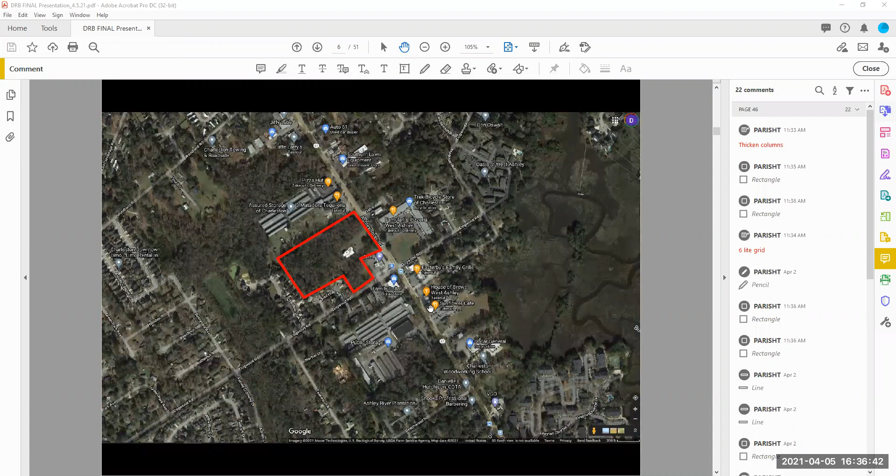You can see the red circle is the location of the site, at the intersection of Dogwood Road and Ashley River Road, the northwest corner. Here's a closer view: residential to the west, a small mini mall across the street on Ashley River Road, more residential to the south, commercial to the north, and the existing gas station on the corner of the intersection that will remain.

This is looking south on Ashley River Road into the entrance of an existing church. This church is less than 50 years old, so it did not require DRB approval to be demolished. I think they're moving forward with the demolition of this, what used to be a church.

This is also looking south on Ashley River Road. This is the existing business that will border the site to the north, and this is the same church that will be demolished. This is looking north on Ashley River Road.

Now this is on Dogwood Road, looking to the west. The existing gas station is to your right, and this area is the beginning of the site. This is close to where the entrance into the proposed site is going to be—right about here where I'm showing my cursor.

This is also on Dogwood Road, looking to the east. These are some of the residential properties that will be just to the west of the site. And with that, I will turn it over to the applicant.

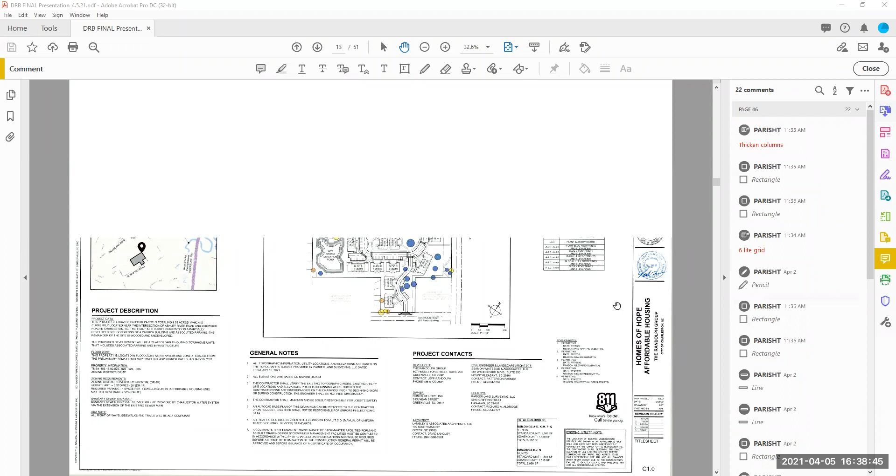So, Rivers Cape, Seamon Whiteside. This is our Homes of Hope project over in West Ashley, at the corner of Ashley River Road and Dogwood Road. Currently we're proposing 78 affordable housing townhome units in 16 different buildings. Our driveway is coming in off of Dogwood Road with a singular internal loop road and a stormwater detention pond planned to the west of the project.

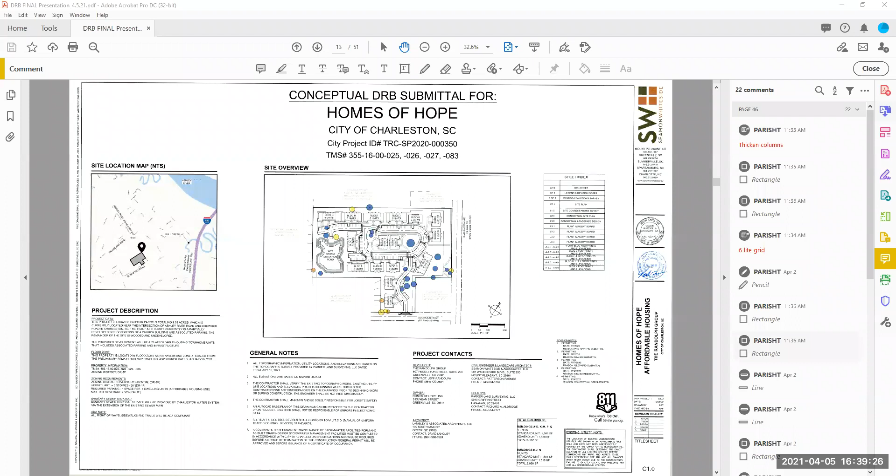Mike, do you want to? Sure, my name is Mike Cottrell, I'm a landscape architect at Seamon Whiteside. If you would move forward through the slides to the landscape portion, we'll move through a lot of the civil right there. There are two main goals landscape-wise: one was to provide a large amount of open space, and the second was to make sure each unit is directly and safely connected to each type of open space on the site.

As you can see on the plan—is this the first slide for landscape or the second? Here we go, this one? Yes, okay. We start off the open space with a central green, number 1 up there, a space created around an existing tree to be saved, a really large red oak, which will be a nice passive open space in the center of the project.

As well as a waterfront park that'll go around the retention pond on the planned west side of the site, which includes an amenity building and a dock. To the east of the site, and throughout the site, we have passive open space creating a network with paths, mostly plantation mix type paths, some concrete especially on the east side next to Ashley River Road, all connected with sidewalks internally linking the buildings to those open spaces. Next slide, please.

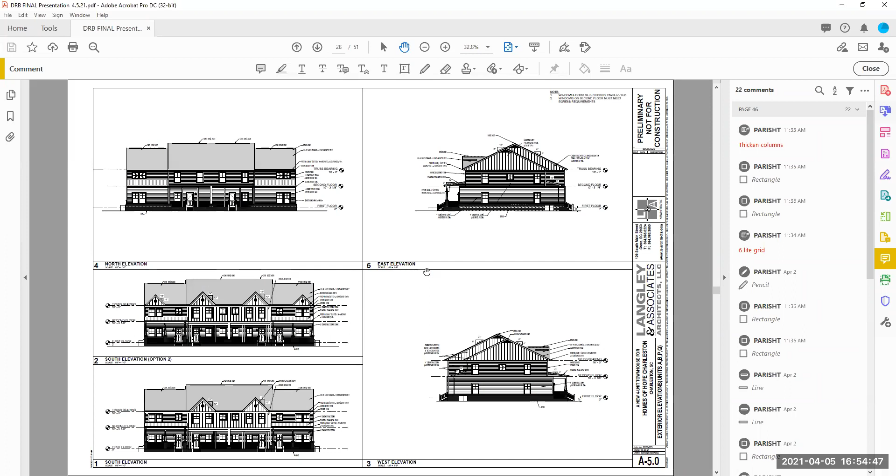Thank you. Let me ask you a few other questions then. I'm kind of scanning through, and when it's trying to align architecturally the first floor and the second floor it's somewhat challenging, comparing it to the elevations that you've provided us. Am I to understand, looking at the back elevation or the floor plan to the rear on the first floor, you, and this is the fourplex, I'm on drawing number A 2.0.

This back porch on the end unit to the left appears to have columns and stairs leading down. Am I reading that correctly? Yes, there's a back porch on the interior middle units, as well as a front porch. Okay, maybe I'm looking at the front then—on the bottom of that first floor plan would be the front, and the top would be the rear of the property. Yes, correct.

Can you walk me through the alignment of the first floor to the second floor? How do they align? The porch is recessed, so the second floor aligns with the outboard edge of the front porch on the interior units. The interior units I understand—it's that end unit. Oh yeah, on the end unit the porch is projecting beyond the front wall. The front wall of the lower unit aligns with the porch of the interior unit, and the porch on the end unit projects beyond that.

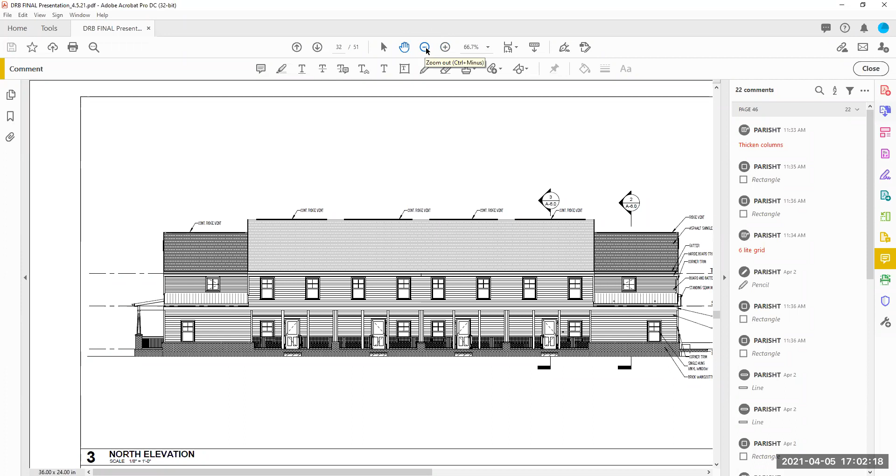The gables that you're showing on the south elevation—yeah, that's just an alternate facade that we had, one where it didn't have a gable on the end and one where we added the gables back on the end. Okay, just as an option.

That's all I have right now. Thank you.

Dino, one thing we were struggling with is the firewalls between each unit, and that's kind of why that offset is that you're seeing on the rear. It's wrapping that firewall that we're required to have, and it misaligns the downstairs and upstairs because we're wrapping the wall on the upper floor, and then we're wrapping it again on the lower floor back into that porch. So I think that's what you're seeing visually—this is maybe what you're asking us to resolve.

Okay, thank you. Any other questions?

With none, we do have one letter to be read that was received. We do not have any members of the public that were registered to speak, so I'll go ahead with the letter. It's from Katie Zimmerman.

Dear members of the Design Review Board, thank you for the opportunity to comment on the conceptual proposal for a new affordable housing project consisting of 78 two-story townhome units. As part of the site plan, I respectfully request that sidewalks be included along the property's frontage on Dogwood Road. I see a path in the design along Ashley River Road, but it is unclear whether there is a safe space for people on foot incorporated in this project along Dogwood.

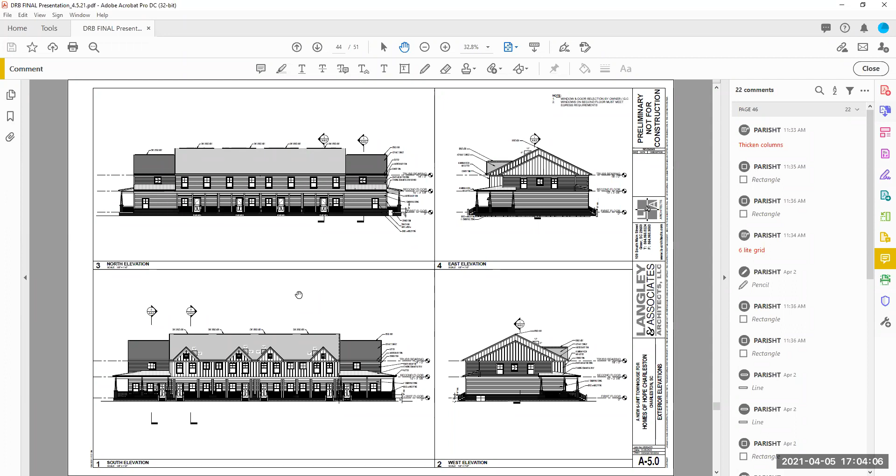Thanks again. So with that, the public comment portion of the meeting is closed, and we are now in staff comments. David, please.

Thank you, Erica. First, some staff observations before I get into the staff comments. Staff has given some feedback on the site plan during TRC meetings, but not on the architecture. The buildings appear to be somewhat prototypical, but as this is affordable housing and attractive architectural style, staff feels we can make an exception with some conditions. Height, scale, and mass seem appropriate, not too overwhelming.

The materials evoke low country or coastal architecture, which staff approves, including the metal porch roofs on the end units and the brick base. Our staff appreciates the different siding exposures between the first and second floors for a variety on the buildings. The conceptual landscape plan and plant palette are off to a good start. The applicants are providing some pervious pavers, which is also good. And there's nice pedestrian circulation with sidewalks and trails.

Staff comment one: staff recommends some articulation to the massing on the fronts of the 4-unit buildings as depicted at the second story. The board and batten and the lap siding sections are in the same plane. This is not the case on the 6-unit building. Number 2, the 4-unit buildings include windows on the sides of the first floor at the end units. Staff recommends these be included on the 6-unit building. As depicted, the 6-unit buildings have no windows on the first floor side, which leaves a long, flush, solid wall.

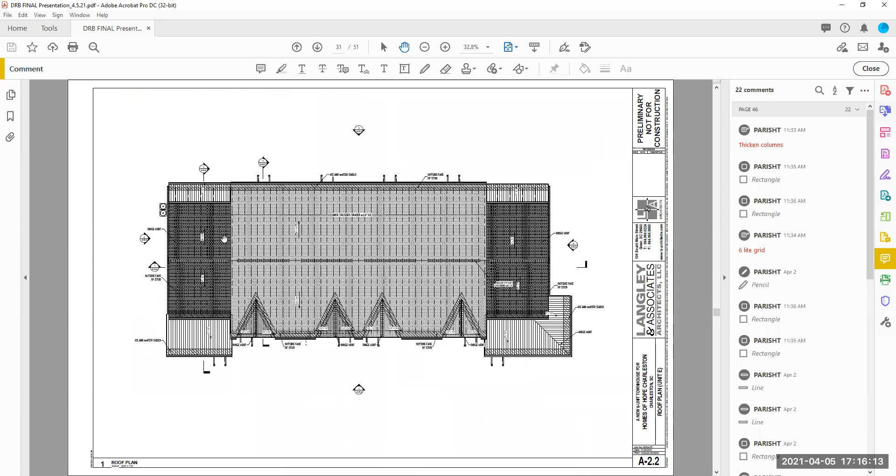Is this a prototype? May I ask the applicant a question, Madam Chair? Is this a prototype design that you have used elsewhere? No, but there are some similar designs. I've got no prototype examples at the end here. These are different, but done by these gentlemen.

Any additional comments or motion?

Whoever makes the motion, if you could include, by the next submittal, having vetted out the filling of the drainage ditch. Because if there is a roadblock with that, it would have a significant effect on the site plan.

One question I had for you, David - sorry, go ahead, Andy. No, go ahead, you had the floor. This may have been addressed before I hopped on, but is the city council ordinance still in effect that our board only sees this at conceptual level, and preliminary would be at staff level since it's affordable housing? That's a very good question, I'll have to check on that.

I think that there's a lot here. Andy, you had the floor. I'm sorry, let me let you go ahead and speak.

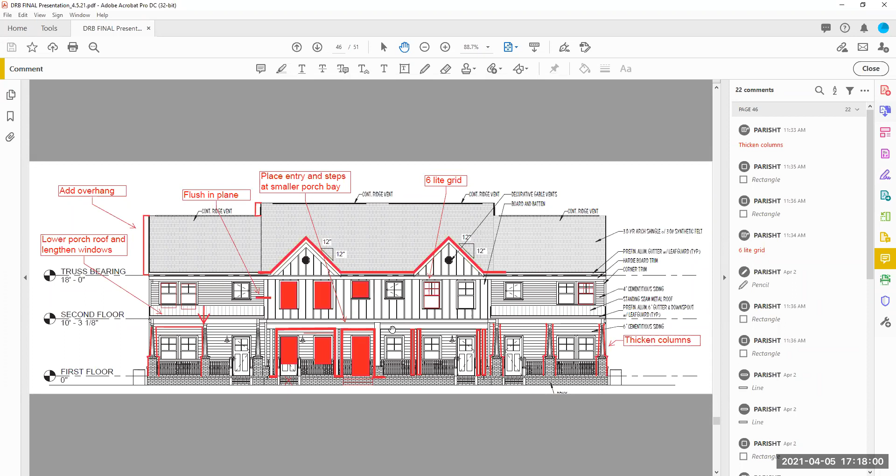This is Andy, and I just had a few points. I agree with staff comments, especially number 14. I'm very concerned with those buildings, and really fairly concerned with the presentation towards Ashley River Road.

This is probably a little strange coming from a landscape architect, but once you start taking the three-dimensional aspects of a canopy and an environment out, 50 feet seems like a long way until you take everything out behind it, and it becomes very transparent.

So I'm really pretty concerned about the presentation off of the site. What's the public seeing? Very concerned with the sense of arrival. I think that does need to be worked on significantly.

I'd like to add to staff's comment number 18 about the playground - potentially some other site furnishings, especially if the path begins to expand. Some benches, even around the ponds, some places for people to enjoy that environment that's not necessarily just your amenity building. I'm not saying a lot, just a few around that perimeter can be very helpful.

I am very concerned about how we're handling refuse, garbage, trash, recycling, whatever we want to call it on the site. It has the potential of becoming a lasting issue, especially with rollout. If you have the potential to do a centralized location, I think it will do a lot for your project.

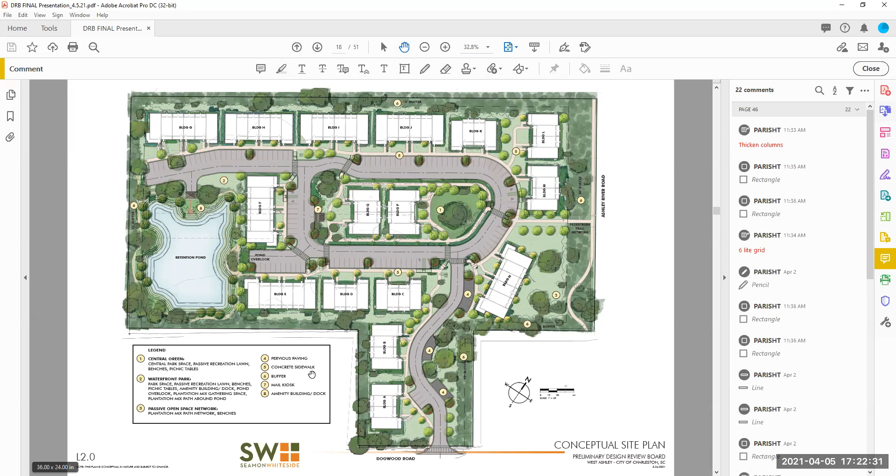Any other comments? Madam Chair, may I ask the applicant one other question? I was curious about the roofing itself. As I understand it, this is a metal roof. The rendering illustrated it, but it's really a metal roof just at the porches, and we're going to do shingles on the main body of the building. Okay, that's exactly where I was hoping you were going. I didn't know if the perspective rendered in a grainy pattern that made it look like there's a metal ridge there, but it's not—it's really the metal roof on just the porches. I believe the shingle roof would be very appropriate for everything.

I agree. If Aaron doesn't have any comments, I'd be happy to make a motion. I'd just like to add what I mentioned before, and I think Andy touched on this a little, but about exploring the path and integrating it into the community amenity spaces better, exploring putting it in the exterior buffer and in some of those green spaces.

Well, guys, y'all need to help me, but I'm delighted to try to put together a motion here. First of all, thank you, David. He's got a wonderful reputation as an architectural firm, and I have no doubt he'll be able to address all these issues. I feel there are a lot of items that we as a board would like to see resolution on before we go into the preliminaries, to save issues, problems, and conflicts as we go down. And so consequently, it would be my motion for deferral with staff comments 1 through 18, all excellent comments.

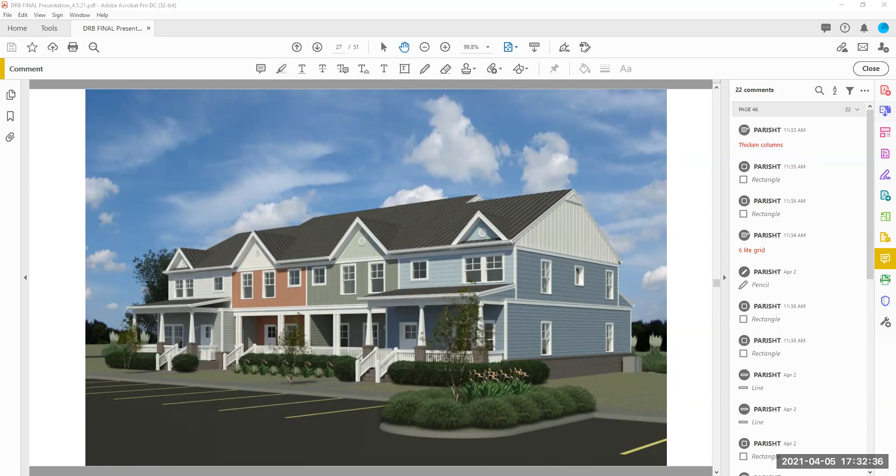So that concludes item number 1. Thank you, everyone, very much. Item number 2 is approval of the minutes from the March 15th, 2021 DRB meeting.

Is there a motion? This is Dino, so moved. Thank you, Dino. Is there a second? Aaron will second. Thanks, Aaron.

And now call roll. Andy, yes, in favor. Kristen, yes, in favor, and same for me, yes, in favor. So that concludes the public portion of our meeting.

We will now need to participate in legal updates and training in our executive session. Can someone please make a motion to go into executive session?